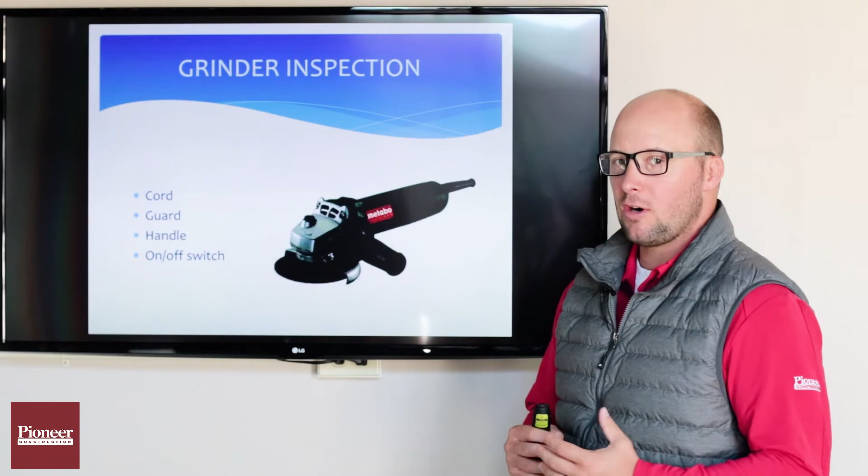This week, we're going to take a look at grinder safety in the workplace. Before we use a grinder, we need to inspect it. Like any other power tool, we need to inspect the cord, the guard, the handle, and then the on-off switch to make sure that's working properly.

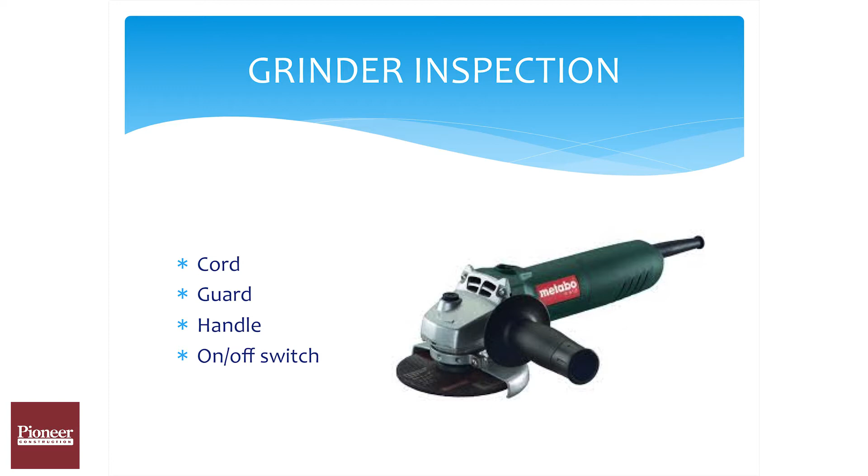A couple other things we need to inspect is to make sure the maximum RPM of that grinder does not exceed our cutting wheel capacity. So that's typically labeled on the cutting wheel. It's labeled on the grinder. We need to make sure it's not overrated, the RPM over that cutting wheel.

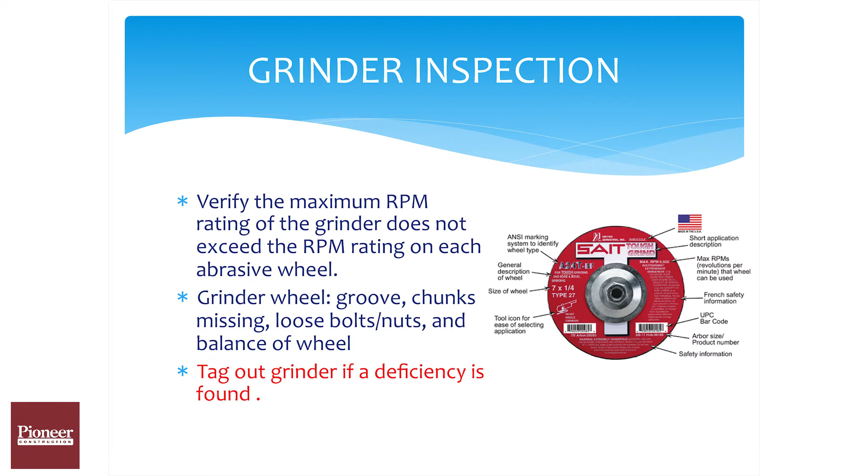We also need to inspect our wheels or cutting disc for any nicks, gouges, cracks. Any defective wheel can cause serious harm and danger. If any of this is found defective, we need to immediately tag it, remove it, and get it into service to be fixed.

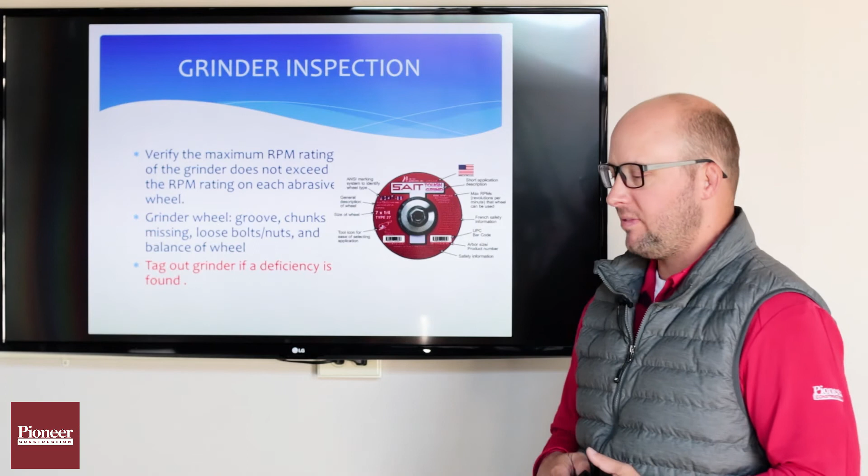A couple other potential hazards when using a grinder are sudden kickback, flying debris, possible combustible and flammable materials, noise exposure, and then strain from continuous cutting with a grinder.

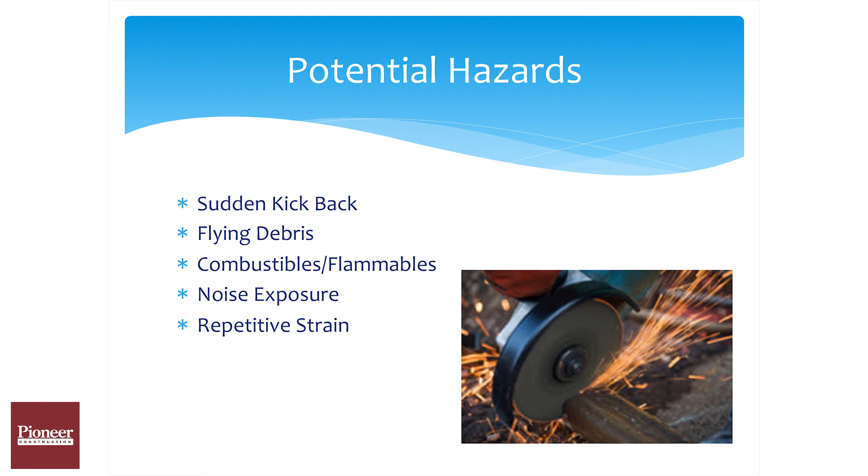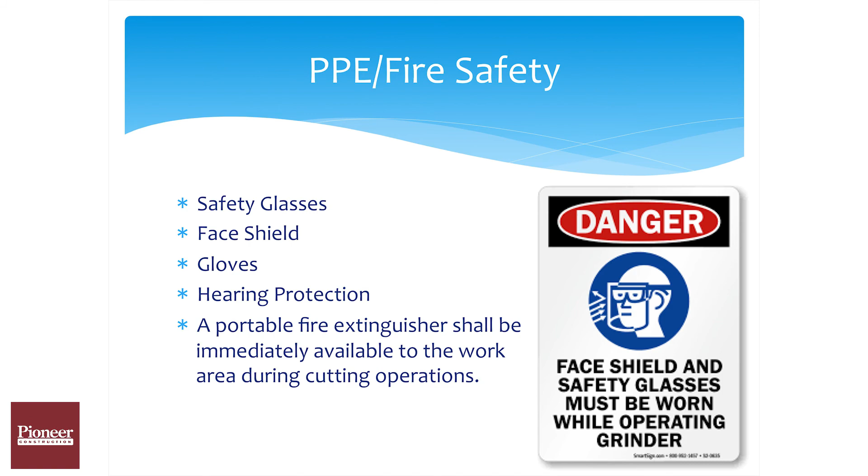Other things we've got to look at is PPE use. We need to have the proper protective gear on. So our expectation is you're wearing safety glasses, face shield, gloves, hearing protection, as well as have a fire extinguisher immediately available within that cutting operation.